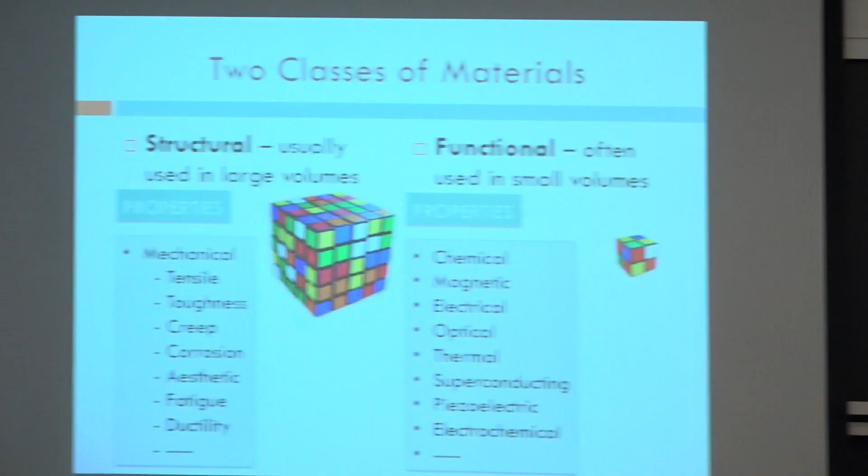Generally the Japanese divide materials into two classes: structural materials, which this course is supposed to be about, and functional materials, which is what 75% of the department works on — chemical, magnetic, electrical, all kinds of specific properties, in many cases medical, type things.

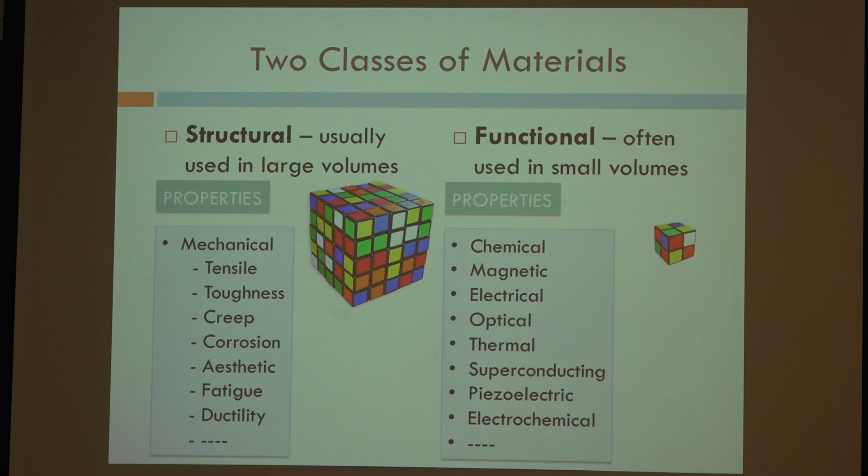But structural materials, you're talking about mechanical properties: strength, toughness, corrosion resistance, aesthetics, and things like that. Structural materials are used in huge volumes. Most people have a hard time even conceiving of the volumes of these materials.

There was a guy, Jack Westbrook, at General Electric, a graduate of this department. In 1962, he put together this curve while at GE for a secret report — pounds per year versus dollars per pound. I've actually redone this about five years ago; it still looks the same, and I talk about it in some other courses. Here are some of the materials.

The material that's used most as a structural material is stone. A very important material, but not used in very large volumes, but very expensive, is diamond down at this end, so far as that goes.

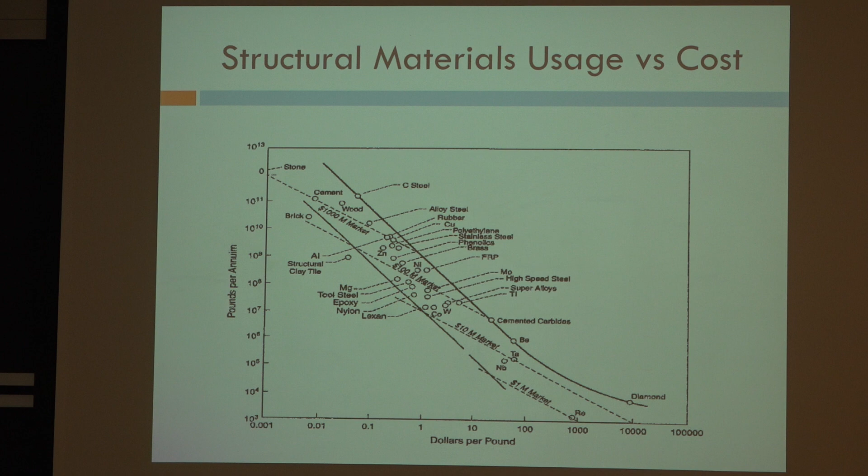I like to give two quotes. One's from Bob Sprague, who's passed away now, but he used to be head of materials for GE aircraft engines: whenever you first hear the properties of a new material, write it down, because those are the best properties the material will ever have. And then Jim Williams, who replaced Bob Sprague, and was Dean of Engineering at Ohio State, one of the world's titanium experts: whenever you hear the cost of a new material, write it down. That's the lowest price the material will ever have.

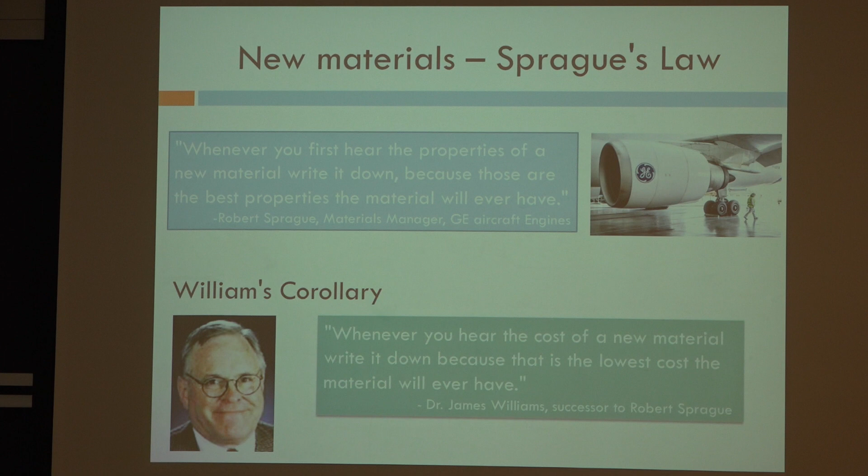So people are always touting new materials, they oversell new materials. Dave Hill's going to come tomorrow—25 years ago he told me it's 'glam tech,' okay? People tell you how wonderful these new materials are, and if you really know something about them, you realize well, they're interesting, but they don't meet all the properties you really need in practice.

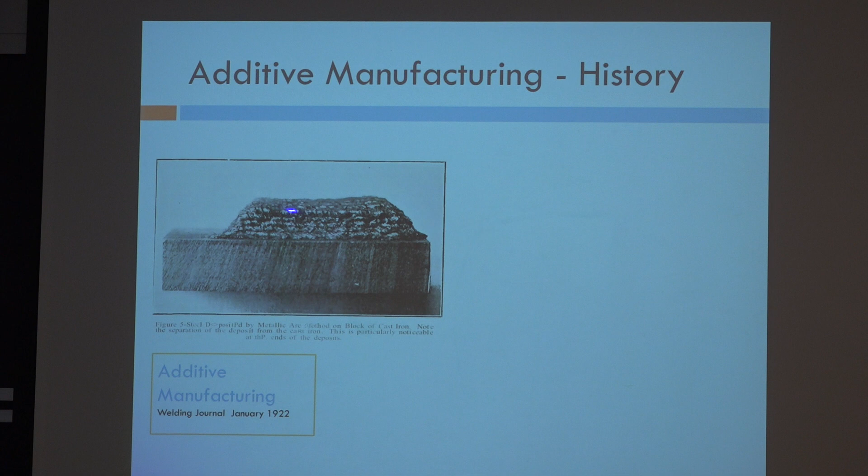So what's the history of additive manufacturing? Well, I found in the Welding Journal of 1922 this additively manufactured part where people were laying weld beads down on cast iron. There are little cracks on either side of this thing, but they were essentially building up pads and doing additive manufacturing. That's the earliest modern example.

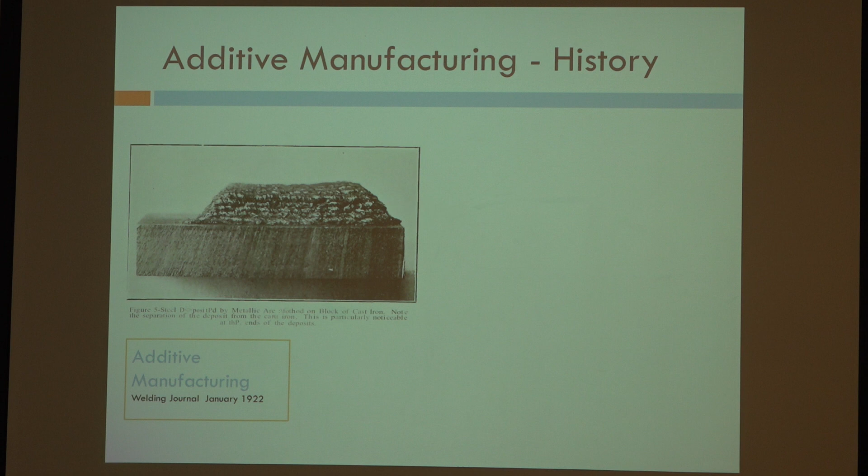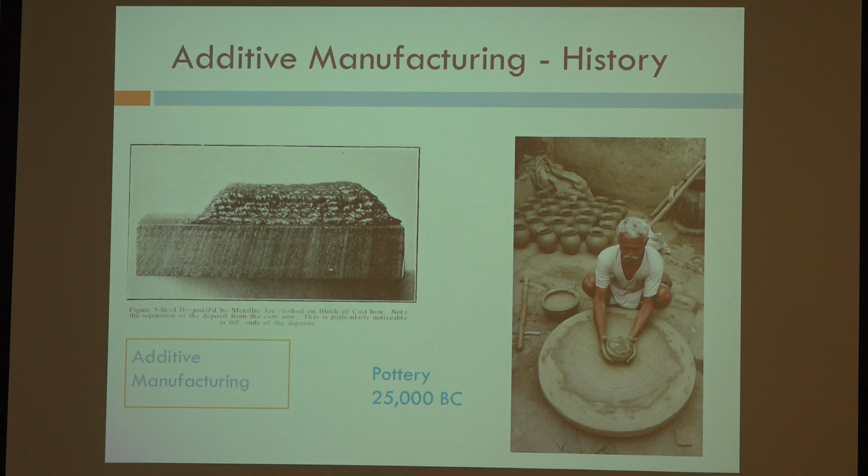Can anyone think of an earlier example of additive manufacturing? Yeah, bricks? You're absolutely right, you got it, you hit it. Pottery, 25,000 BC, okay? That's additive manufacturing, isn't it? May not be metals, but it's certainly additive manufacturing. You take clay and you add it up and shape it to what you want.

Concrete is tied for number 2. I like to pass around this piece of concrete. When you grab that, what's the first thing you feel about it? Super light, it's super light. That's a piece of fire brick for lining, or fire concrete for lining a chimney. You want something that's got lots of pores in it, so it's a good insulator, okay? They can engineer concrete in all kinds of ways. That one was specifically easy to bring to class because it's light, and it is light, isn't it? It's amazingly light when you pick it up.

Tied for number 2 is engineered wood products. I'm not including all wood—there's a much larger billions of tons of wood if we include wood as a fuel. But as an engineered wood product, we can make better I-beams out of wood by essentially making them like we do plywood. Plywood is an engineered wood product.

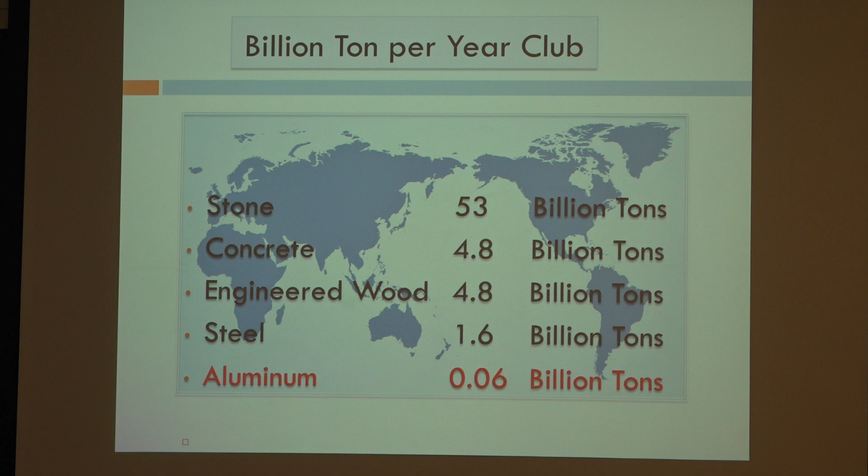So by volume, yeah. We often talk about specific properties being normalized to the density of water, okay? And aluminum is stronger than steel in specific properties. In many cases, high strength aluminum is stronger than a lot of steel in specific properties. But then you actually have to get to the real structural application.

If I'm just building a huge stationary breakwater in a port where ships are going to dock, I'm interested in the lowest cost per volume that will survive in the water and not corrode. And concrete doesn't really corrode in the water for a long period of time. So volume is the most important thing there.

But in other cases, I need the structural strength, and so I measure the strength of the thing. Steel is stronger than concrete on a strength basis, certainly in tension, and many times even in compression. So you have to look at the actual application to decide what your quality metric should be. It's not always the same.

And in fact, that's one of the fallacies, and we'll get to that later, where sometimes you assume the quality metric is one thing, and you think something is wonderful because of that. That happens in 3D printing.

Other questions? Okay, the next thing I want to talk about is over time... oops, well, that's interesting. It's still on. Oh, no, it's not up there. It's on, my computer's on. I just unplugged it. Okay, let's see if it's happy now. Okay.

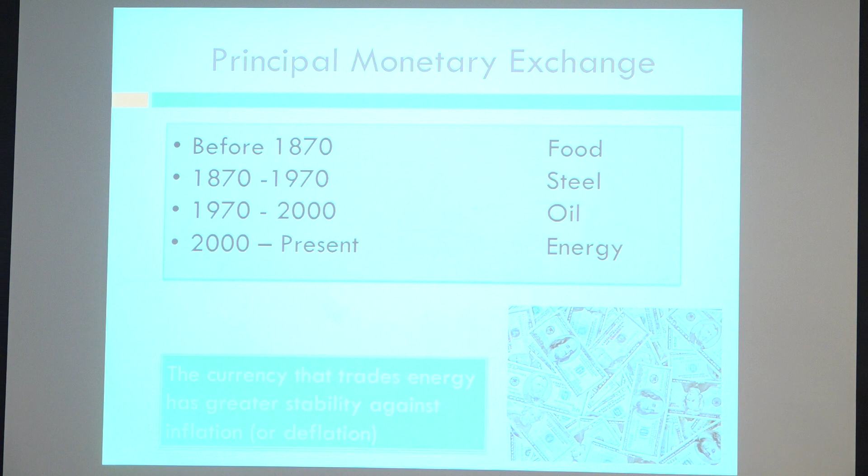So if you look at what was the principal non-monetary thing that people were buying and based their trade on, in the old days, it was food: how many bushels of wheat or barley or corn or whatever. And that's because up until the 1870s, 97% of the workforce was engaged in agriculture just to eat. Only 3% of the people were lawyers and doctors and things like that.

From 1870 to 1970, you had Henry Bessemer and then Andrew Carnegie. Steel and the railroads took over, because it became possible to produce steel after Bessemer showed us how, and Andrew Carnegie became the richest man in the world. He was richer than Bill Gates or Carlos Slim or any of those other people in today's dollars.

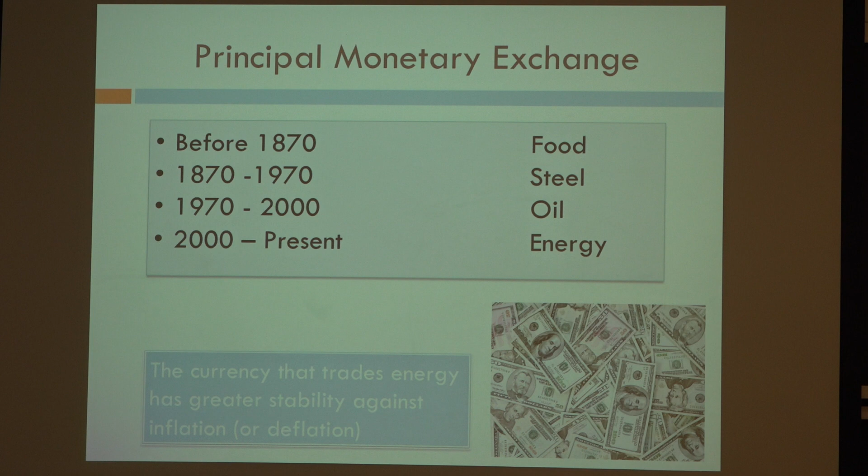And from 1970, or the early 1970s, after the Arab oil embargo in '73, oil became the monetary thing. In one of my lectures on steel, I go through how that has changed and why, in terms of what it takes to make steel. It used to take a lot of labor 400 years ago; today it takes mostly energy. The raw materials and the labor are a small fraction of production of a metal today.

And really, oil's been supplanted by other forms of energy, whether it's solar or wind or whatever. But energy is still the thing that you measure the value of materials in. And so you can look at the energy content of materials.

When peace broke out with the Soviet Union with Gorbachev in 1985, and then into the early '90s, the Soviets had tremendous electric capacity in Siberia. You can't transport electricity more than about 1,000 miles. Why? Anybody know why?

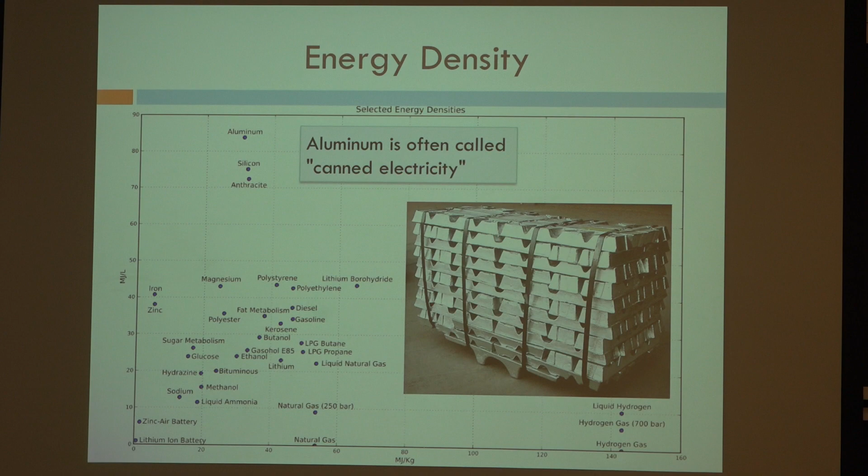What they could do is produce aluminum and transport it by rail better than transporting all that hydropower. So they started dumping aluminum on the world market and destroyed the business for Alcoa, Norsk Hydro, Alcan and others, who basically got out of the business. That's how the Soviets transport their energy from Siberia, and there's a lot of it there. But anyway, I'm not going to go through all these things, they're in some of my other lectures, I just stole these.

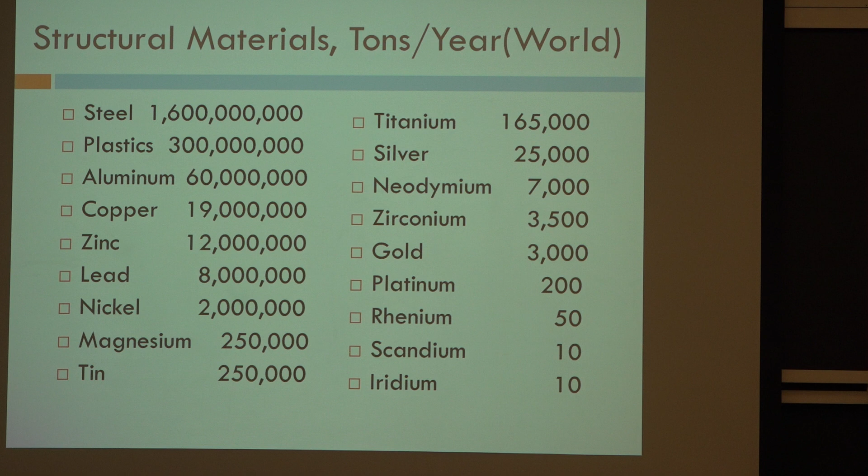Structural materials: steel is at the top. Plastics are number 2, everything from polyethylene to some $400 a pound plastic used in aircraft, but all plastics are only 1/5 the volume of steel. Aluminum's way down here, and then things like scandium, of which we only produce 10 tons a year. You can ask me later what scandium's used for. The dollars per ton are all over the map - steel's fairly cheap, plastics are actually fairly expensive.

Aluminum's fairly expensive compared to steel. Copper and a lot of these other metals aren't used as much because they're a lot more expensive than steel. But you get to things like gold, the platinum group metals, or scandium, and they get pretty pricey.

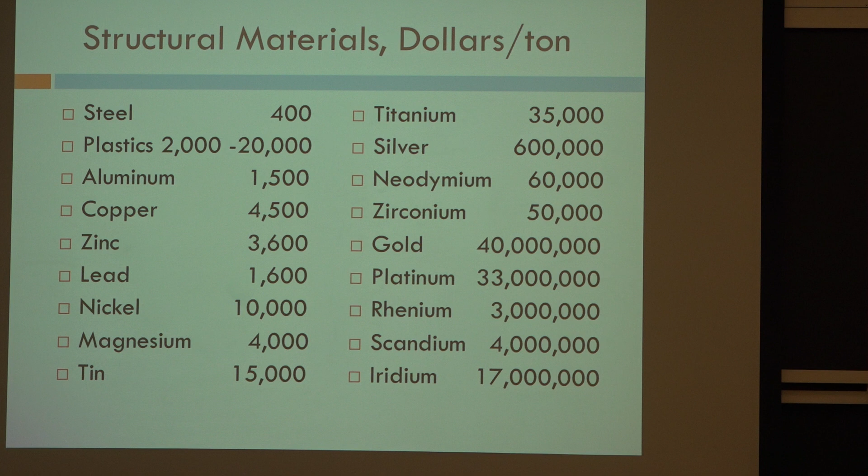I'll tell you what scandium could be used for. If you could put 1/10% scandium in aluminum alloys, you could increase the aluminum strength by 10 to 15%. Boeing would love you. But the problem is putting 1/10% scandium in aluminum doubles the price of the aluminum, even though it's only 1/10%. So where do we actually use scandium in aluminum alloys? I should have brought my sample. Anybody know? Baseball bats - you can get 100,000 PSI strength in scandium aluminum baseball bats.

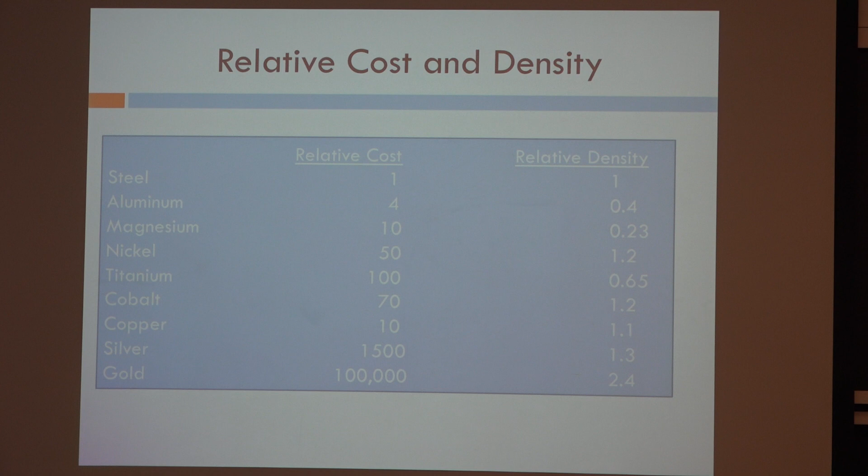Anyway, this is relative cost and density, which gets to your question - there's lots of metrics for these things. I mentioned the materials for the 21st century research needs on Stellar; if you went back 20 years, I had a lecture on structural materials, and this is a summary of the whole course in 4 pages. In there I point out that the value of a pound saved in an automobile over its life, about 100,000 miles, is $2 a pound.

If you ship something by rail or by boat, it's only 20 cents a pound. So I can transport concrete around the world at 20 cents a pound and still pay for the energy savings. Spacecraft materials are worth $20,000 a pound. So sometimes people talk about advanced materials or additive manufacturing and give examples from the aircraft or spacecraft business, but only because that's the easy example - you don't have to talk about cost. Cost is not the driver there.

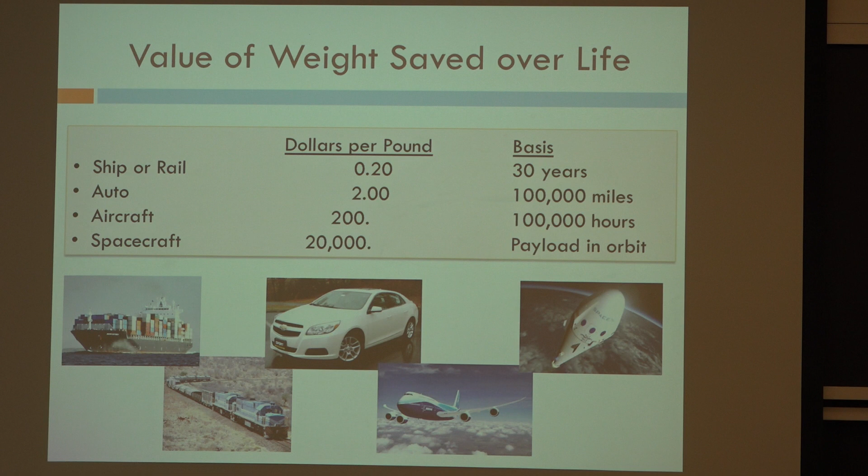So why are we interested in advanced additive manufacturing of metals? Well, we're not just interested in additive manufacturing of metals - most of the additive manufacturing that's been done, starting with pottery 25,000 years ago, is for non-metals.

If you watch the lecture from spring of 2015 that I suggested, I give an example of the problems with additive manufacturing of metals, things like surface tension. Metals have a higher surface tension than any other material, and it all has to do with the chemical bonding. They have surface energies 4 times, sometimes 10 times that of most ceramics, and therefore they want to ball up. Once they start to ball up, it's very difficult when you're doing laser surface melting or electron beam melting to get rid of the defect. So there's problems with additive manufacturing of metals.

One of the things I wanted to do back 30 years ago was when Ely Sachs and Mike Cima invented the term 3D printing. They called it 3D printing because they started with an inkjet printhead, and all they did was take an inkjet printer and spray the binder on a layer of ceramic powder. Wasn't really fancy, but they were able to make things immediately. That's not the first additive manufacturing though. The first was about 1985 down in Texas: selective laser sintering, where you take 2 laser beams in a polymer liquid, and where they intersect, you get a high energy density because of the beams intersecting, causing the liquid polymer to polymerize into a solid. You make this very friable, weak plastic.

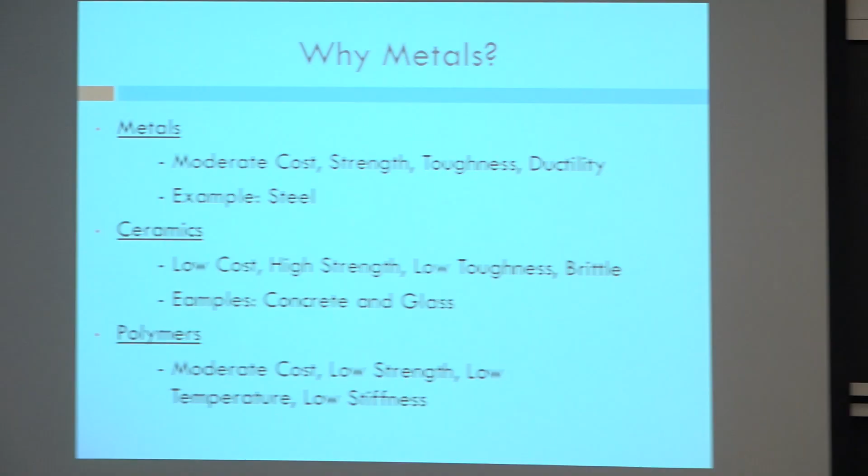Then people have been trying to use it for all kinds of things, but they had a lot of problems trying to do it with metals. That's what you'll see if you watch that video of my 1-hour lecture, why metals are a problem in trying to make the whole process work. But in fact, we have been doing it — that was the end of that lecture.

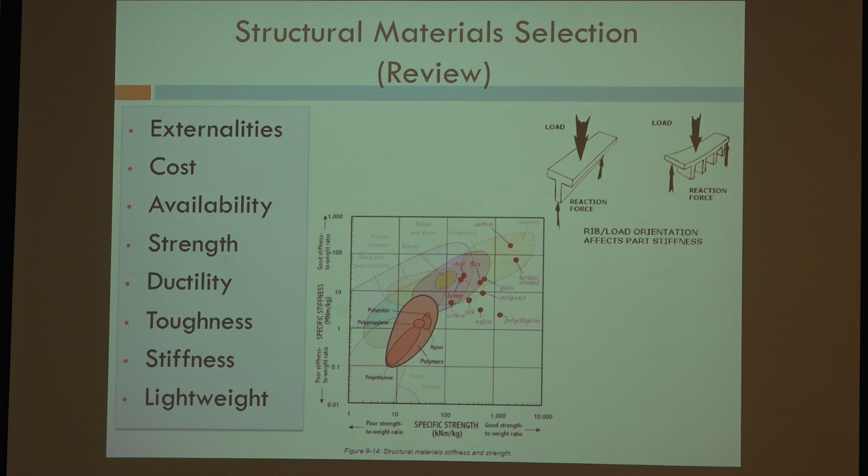We've been doing additive manufacturing with metals for 100 years. I've been to steel plants where they're rebuilding the steel rolls used to roll steel for continuous casting, rolls the size of a football field, with nothing but a bunch of lathes refurbishing the rolls, just laying metal down to resurface them. That's additive manufacturing. You can't afford to throw away these huge rolls.

So we've been doing it for years. But what we are going to do for the next few lectures is I'd like you to go through the Digital Alloys Guide to Metal Additive Manufacturing. Alex Huckstep is their Vice President of Business Development. He will actually go through it, and he's trying to sell this technology, but he did a series, and I think it's a very fair series, comparing the 15 or 20 different types of additive manufacturing of metals.

It is a guide to metal additive manufacturing. First he talks about the business value. Has anybody had a chance to look at any of these yet? They're not very long. We will, in some of the next classes—next class we're not going to talk about this, we're going to have Dave Hill here—but it's got applications, economics. He actually gives a very bright picture, and he talks about dollars per cubic centimeter.

They're fair numbers, but in fact, to make a part twice the size of this out of titanium might be a $20,000 part. Whoops! No wonder I'm only talking about spacecraft and aircraft, okay? To make a part like this...